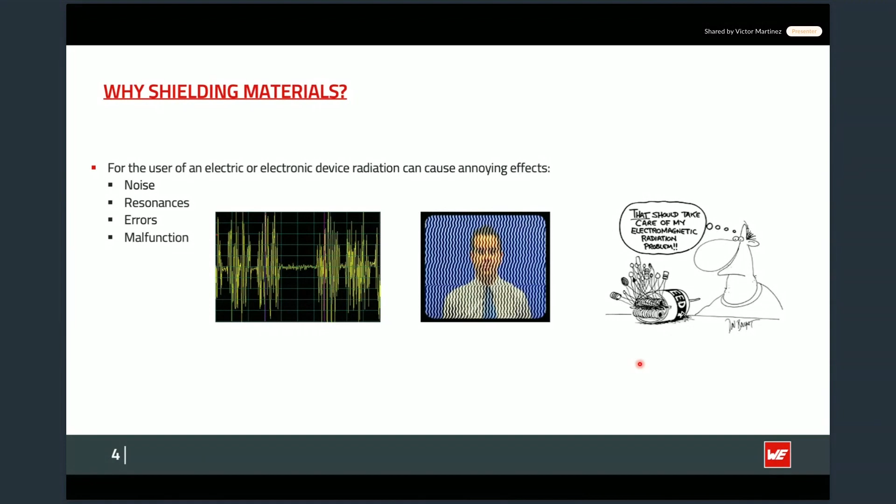Then one of the first things that we need to have clear is what can provoke problems here. Going into the basics, it is an antenna. An antenna will be the root of all the problems that you could face. An antenna can be something pretty big that you can find outside, like the big TV antennas or communication antennas. Or if we go a bit more into our devices, it can be something really basic, like an input-output interface or a cable, or some traces from your PCB, or even the ground planes, or even a small thing like a via.

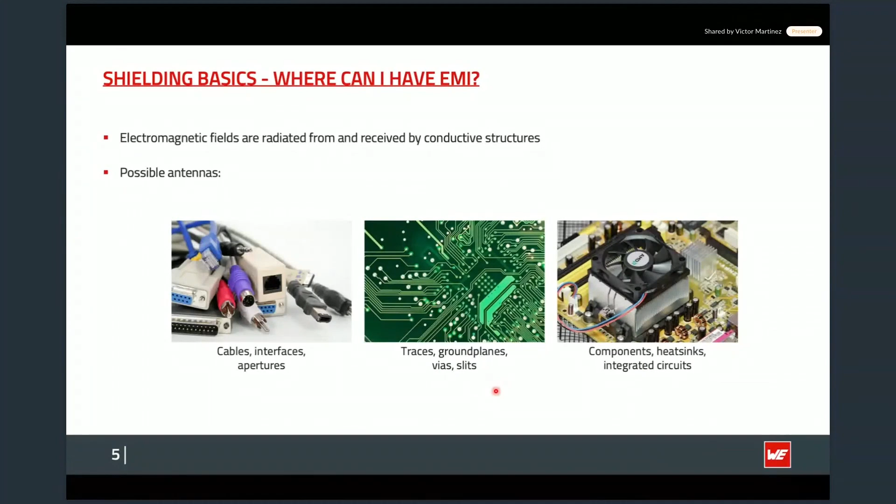And it is not only something physical that you create in your PCB that can act as an antenna. It can be some basic components, like in this case a heatsink, which at the end is something that is only there to dissipate heat.

Then another important thing that we need to clarify about shielding materials is how you can quantify them, or how can you say that one shielding material is better than the other one. In this case, one parameter that the engineers define is the shielding effectiveness, which can also be named attenuation, and the definition of it will be how good the material is in order to attenuate or remove the electromagnetic field.

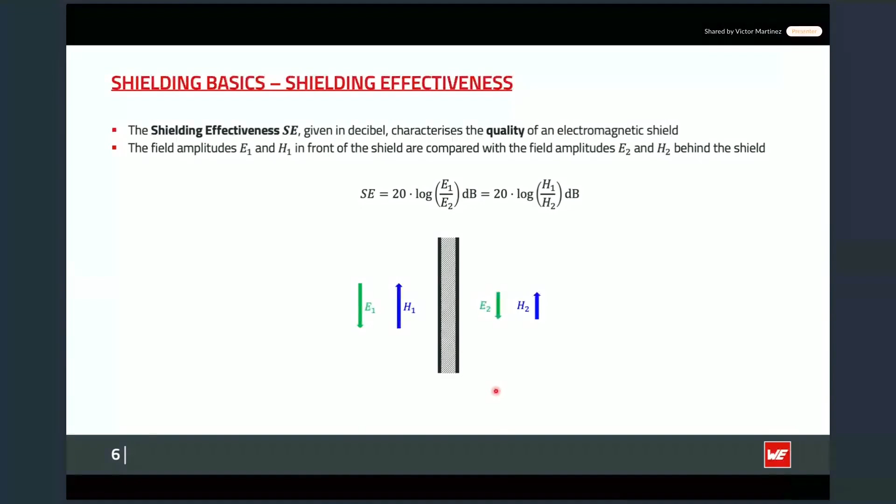And then the mathematical definition of this parameter is pretty simple. At the end, it will be the measurement of the environment without the shielding material minus the measurement of the electromagnetic field of the environment with the material in the middle. So at the end, we could have the real value of how much it will be attenuated.

Then some basic rules of thumb about which material you have to use. Let's say that you have a bad electric field that you want to attenuate. In this case, what you will need to use is a high conductivity or low impedance material, like for example the traditional copper tape, as you can see here, or even the aluminum tape. A good thing here is that the thickness of the material doesn't matter.

So for example, you could go to a really cheap and thin layer of aluminum tape that you can just stick over an area, and then it will automatically react to the electric field by attenuating or absorbing it. And the same will happen if you use, for example, a copper tape or even the conductive fabric tape. So the main thing here is to look for a low impedance material.

But then let's say that we go to the other side of the street, and instead of removing an electric field, what we want to remove is a magnetic field. In this case, we don't want something that has a low impedance. What we are looking for is something that has a high value of permeability. Permeability is the capability of the materials to interact with the magnetic field, meaning that the higher the permeability, the more it will be able to interact with it.

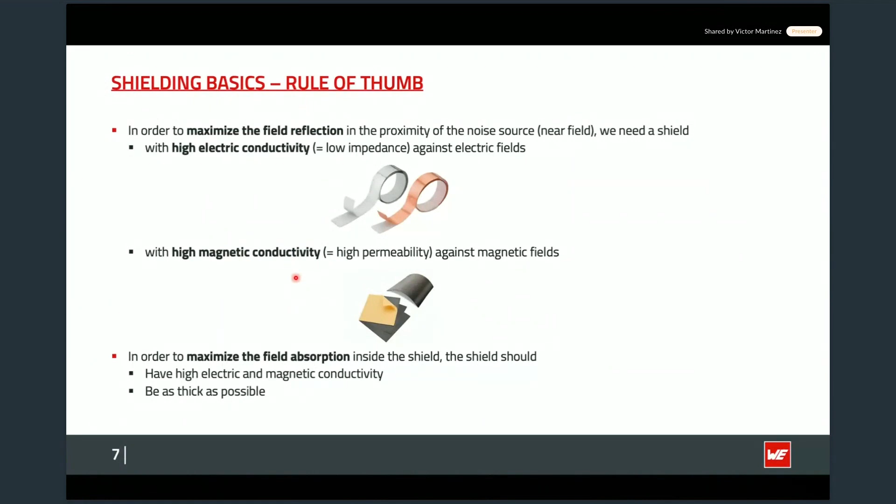And now we are going to jump directly into giving tips about how to use the different products. One of the main products that you can find when looking for shielding materials is EMC gaskets. EMC gaskets can be found everywhere on your device. For example, on the housing, when you have a door or a lid that you need to close. They can also be used on the EMC chambers, as you can see here, or even on the input-output interfaces, to connect the cables.

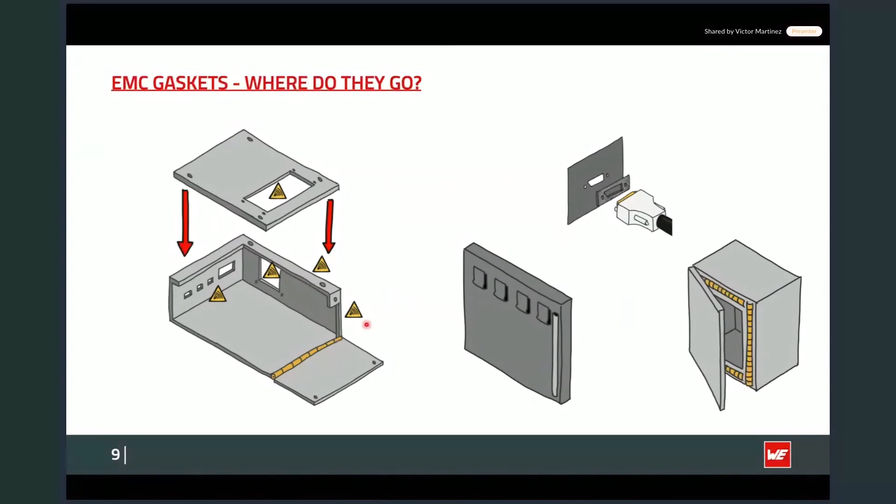And you can already start seeing the pattern here. EMC gaskets are used when you need to make contact between two metallic surfaces, or to fill gaps. Because once we make contact between two metallic surfaces, we may think that everything's super smooth, so I don't have any kind of discontinuity here. But that's not what is happening.

If we get a microscope and zoom in, we can see that we have some small air gaps here that will act as an open door for the noise to go to the outside or into the inside. So here, let's say that this is the housing for your device, and you have your PCB here on the inside.

So then if we are not using an EMC gasket, that means that the electromagnetic noise or the electromagnetic field that is on the outside can go into the inside, and then it will affect, in this case, your PCB. Or if the PCB is creating a lot of noise, then it can go to the outside, and then you will fail, in this case, the EMC test.

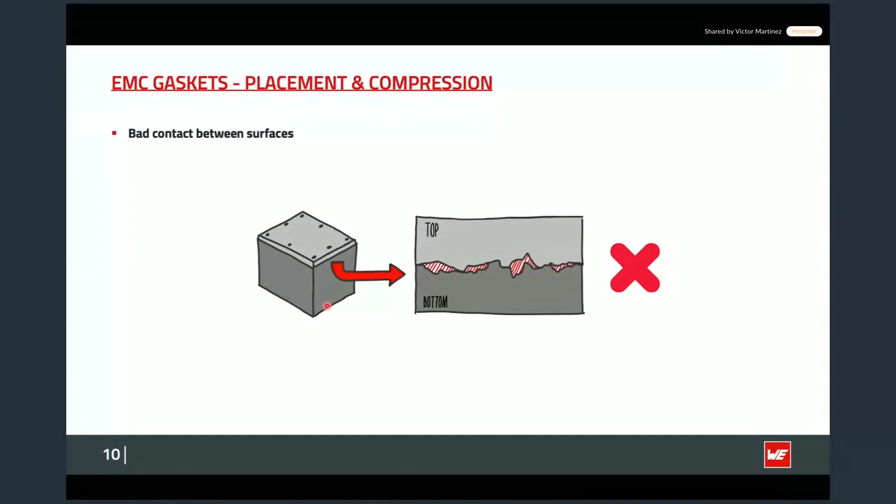And then let's say that the big summary here is that what we want with our housing is, at the end, to have a perfect parallel box that is fully closed. But that's not something that we can reach, especially if you reach out to your colleagues who are mechanical engineers, because at the end you will have ventilation holes, lids, you will have to put a display over there, so then it is not reachable. And that's why you need to use, in this case, EMC gaskets.

Because then let's say in this case that we have the door or the cover. If we are using the EMC gasket there, then we will be able to fill all of those gaps with conductive material, in this case from the EMC gaskets, and then we will be able to have something that is pretty close to a perfect parallel box. So what we will avoid is the noise popping up to the outside or the noise from the outside popping into the inside of our device.

Then another important thing here for the EMC gaskets is that normally there is also another rule of thumb. During this webinar I'm going to say a lot of rules of thumb, because at the end it is the most useful thing: once you are designing your device, you have some guides to later go more into details. So the first rule of thumb in this case for the EMC gasket is to compress them normally

around 20%. Why are we saying that we need to compress the EMC gaskets around 20%? Because that's normally the sweet spot where the gasket can offer the best parameter for conductivity, so the lowest RDC or the lowest impedance value. And at the same time, you are not overstressing the gasket mechanically, meaning that the material, the foam inside or the metallic material, is not overstressed, so you can compress and uncompress it more times if you are compressing it 20% more or less.

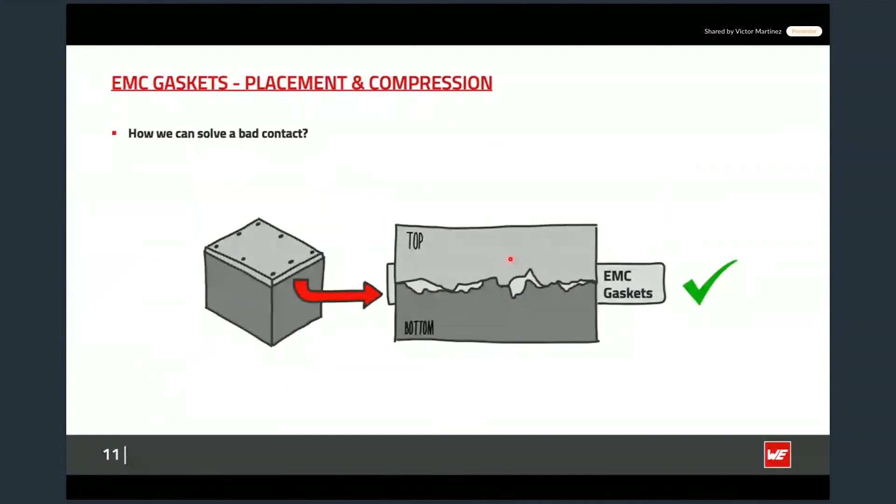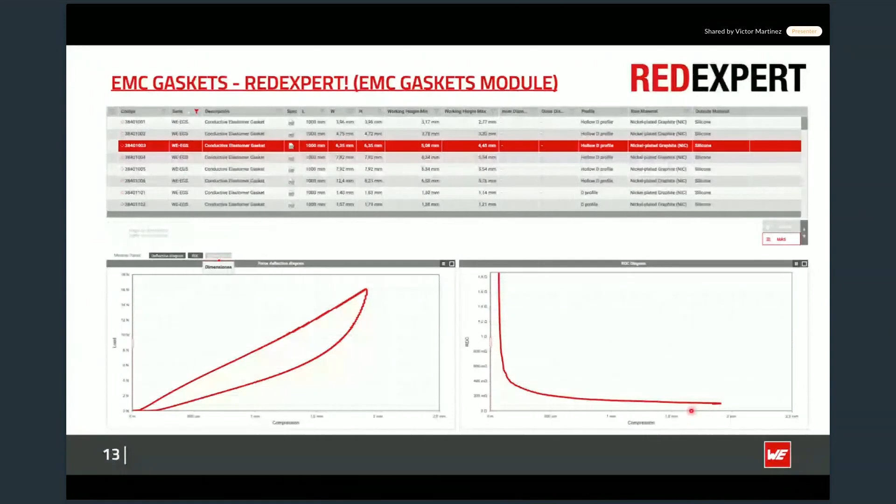And then on the right, what you will be able to see in our REDEXPERT module will be the RDC chart. This is actually a live measurement which we did, just compressing the gasket. So you can see that once we are compressing it between 20% and 30%, which will be more or less this gap here, we are already achieving the sweet spot, the best value of conductivity. And that's why I'm remarking all the time that it is quite important to compress it around that range.

Another important thing about the gaskets is to choose the correct materials. Because at the end, what we are doing is that we are creating a kind of battery, because we have the EMC gaskets, which are a metallic surface, then we are adding a different metal, and then we have the other metallic surface. And what you're provoking here is that at the minimum that you have a small kind of current, you are provoking a battery.

And from those two materials, one will be the cathode and the other will be the anode, making the anode start to lose mass or weight, and it will get oxidated or eaten. Meanwhile, the cathode will start to gain more mass, and at the end you could have an oxidation layer, making it that you don't have conductivity in that place. So that's why it is really important to get a galvanic table of materials, and then to choose the correct partner.

Because in this case, one of the most common, just going to an example, aluminum, is pretty common to use on enclosures because it is light, it is cheap, and also it is pretty rough. And then, for example, let's say that we are going to use a gasket made of nickel-plated copper. So if we check the aluminum, it is in this position. And if we look for the nickel, we can see that they are pretty far away.

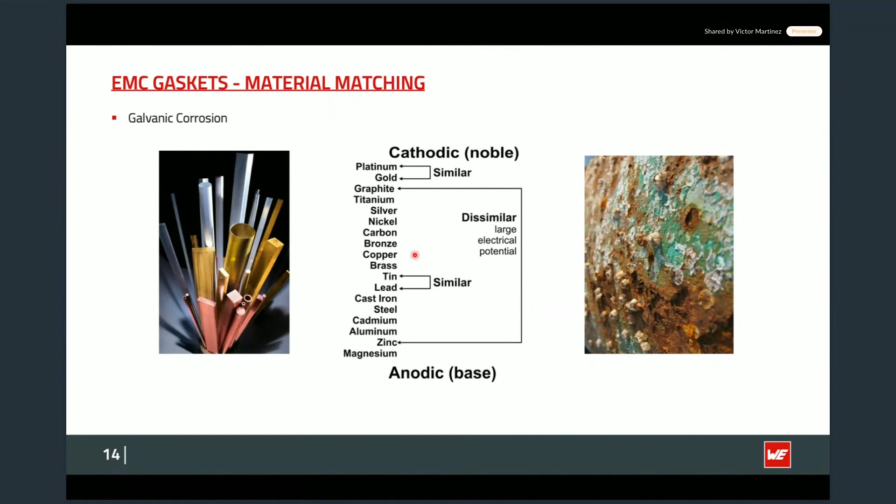And then going back to the gaskets, we have several types of them. We have conductive elastomer gaskets, conductive fabric gaskets, contact stripe gaskets, or in this case metal gaskets, and then we have a knitted wire mesh gasket. So these 4 groups are the most popular or the most traditional ones. And every gasket is meant for one situation.

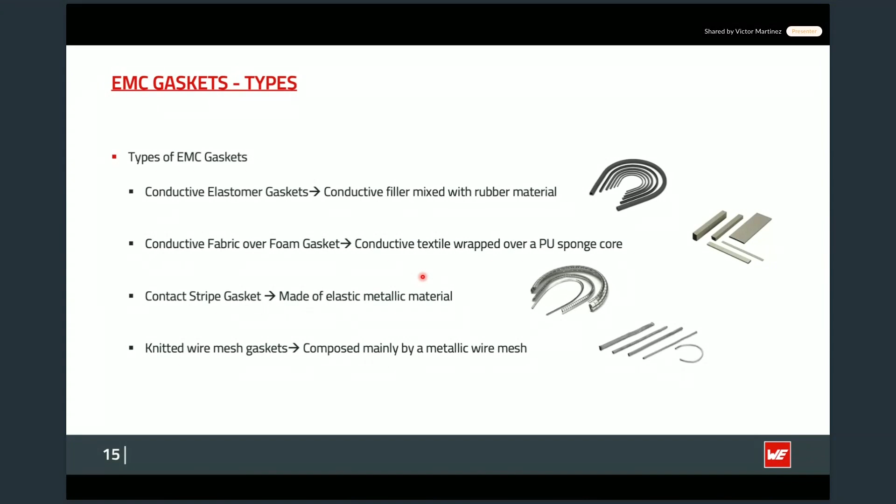So if later you come to me asking which is the best gasket that will fit every situation, every application? Sadly, my answer will be, it does not exist. Or if it exists, it is not going to be really cheap. What I mean with this is that all the gaskets are meant for a specific situation. For example, we created a kind of cheat sheet, like the ones we were using in high school to help ourselves during the test.

And here you can already ask yourself the different questions. For example, which ingress protection value do I need? The ingress protection value is the protection to avoid dust or water going through the gasket. So do I need something above 50? Then we can see that the metal gasket doesn't work, and neither does the knitted wire mesh gasket. So we are left with only these 2 options.

Then the next question you can ask yourself is, which temperature range do I require for my application? If your application requires something above 90 degrees because it is close to an oven, because the standard requires it, or anything like that, then you can discard the conductive fabric over foam gasket, and you only have one choice, the conductive elastomer gasket. But let's say that instead of 90 degrees, the top of the temperature range is lower, like 80 or 70. Then we have these 2 different options.

But when you go to your accounting department, they tell you, no, we need something really cheap, something traditional, and something that is easy to use. So the best choice will be, in this case, the conductive fabric over foam gasket. So again, every gasket suits a specific situation.

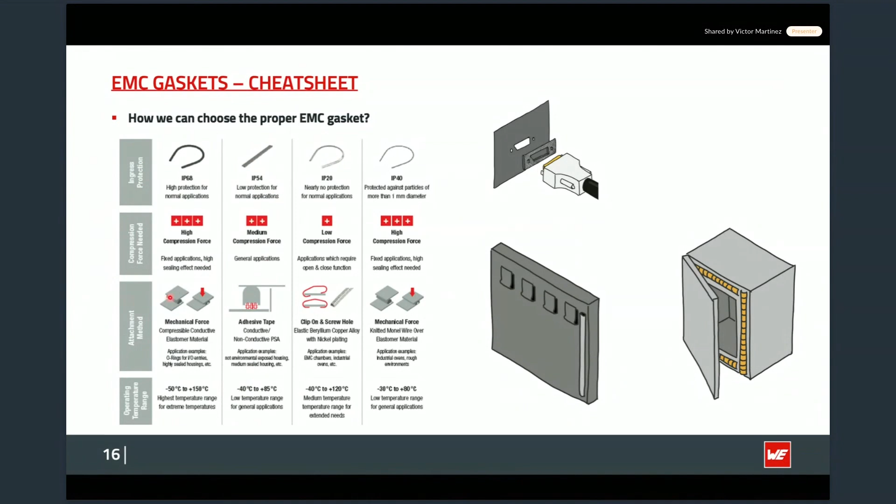Then the next product group that I'm going to jump into is the EMC tapes. EMC tapes can be split into two different groups: the metallic ones and the textile ones. As the name indicates, the metallic ones are mainly made of a metal layer, which can be aluminum or copper. In the textile group, we have only one available for the moment, which is the conductive fabric. The conductive fabric is a piece of cloth whose threads are made of nickel-plated copper, making it conductive.

Then when to use each one of them? Normally there are only two decision makers here that will motivate you to choose one or the other. First of all, it is again which materials I'm going to make contact with, because of the galvanic corrosion effect that we explained before when putting two different materials in contact.

So I need to choose the correct partner here, or the correct match. And then it will be the flexibility. Why is the flexibility a game changer here? Because let's say, for example, you need to use an EMC tape in order to create the shielding for your cable, because your application has the typical cable from AliExpress or from some provider that you may not know in one year because they disappear, and they don't have, in this case, the shielding. So in this case, the conductive fabric can be the best option, mainly because you can already wrap it and it is more flexible.

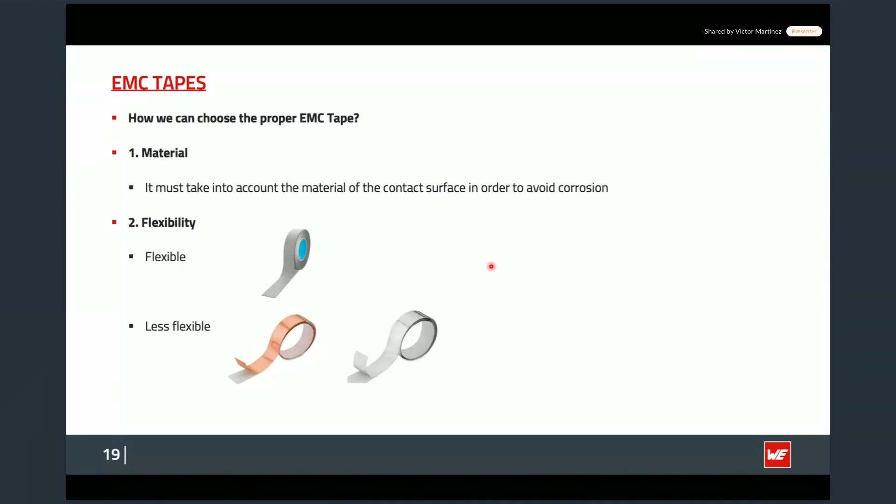Some tips about using the EMC tapes: first of all, the conductive tape that we have on the bottom is a conductive glue that has some conductive particles or conductive bubbles in it. So it is really important and vital that once you are applying the EMC tape, you use a roller, or maybe just your fingers, and rub the top surface of it. Then you are ensuring that you are breaking the bubbles and compressing it extremely well.

That's a really important topic, because if you just place them and don't apply some pressure over them, then what can happen is that you will have an open, or you don't have conductivity, because the bubbles made of conductive powder won't break. So it is something to keep in mind when you are using them.

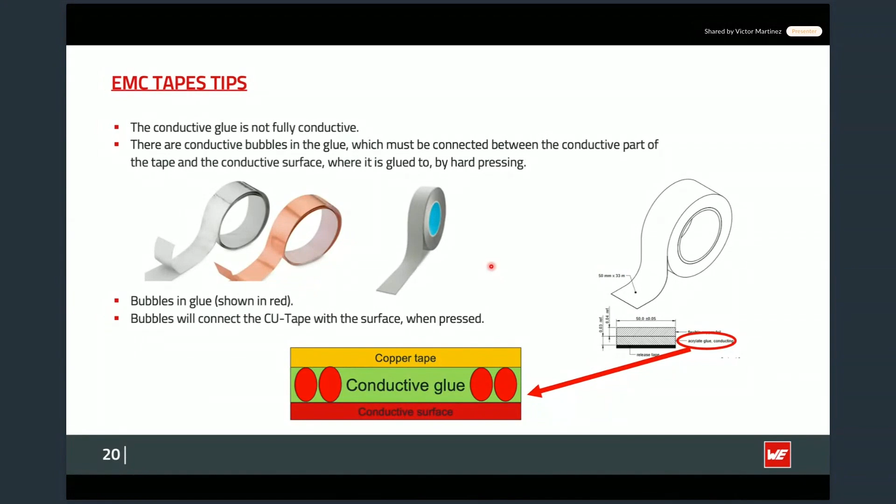Speaking about tapes, I commented that they can be used to create the shielding for the cables, but normally you will use them especially to avoid the pigtails. Like, for example, you can find on this connector or on this USB cable that we found from a provider. So what is a pigtail? A pigtail is a piece of the cable's shielding that is directly linked to the enclosure. The copper layer of the cable is the shielding, and as you can see here, just a small piece is connected to the enclosure, or to the metal case of the cable, making it so that at high frequency you will have a wonderful magnetic field antenna, because you will find here a loop antenna.

Speaking from experience, this is normally one of the main issues you could face in the EMC chamber. Once you go in with your device, if you are using a cable that is not really trusted and you don't know where the noise is coming from, my first recommendation would be to check the cables, because they can be a really nice source of problems.

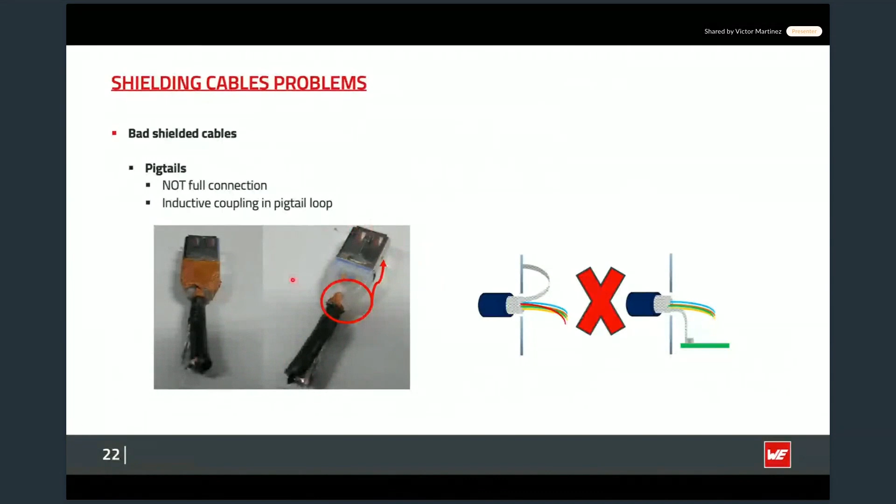And what's the best way to fix this issue? Really simple. Just wrap the whole cable with the shielding material, like the shielding textile or maybe some metallic wire mesh. Wrap the cables and then add as many contact points as possible to the ground plane, or maybe to the housing. And also be sure that those contact points ensure that you have a 360 connection to the enclosure, so that they are fully wrapping the whole cable.

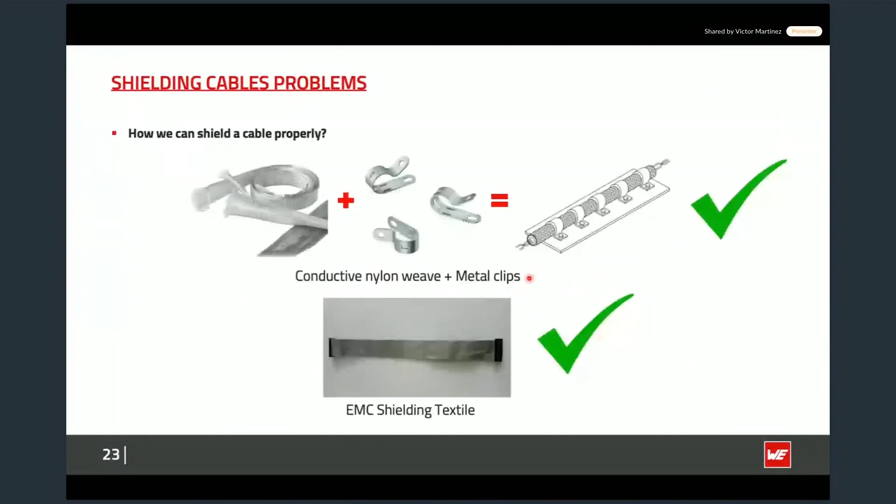This is required because what you are avoiding by doing the 360 connection is, in this case, the pigtails, which is just a small piece over there, because then you are offering more path to the noise to go through it.

Another important thing is to not paint over the surface where you're going to connect, in this case, the cable. Because if you are adding paint, and normally paints are not really conductive, then you are just placing something conductive over something that is non-conductive. So be aware also about that kind of problem.

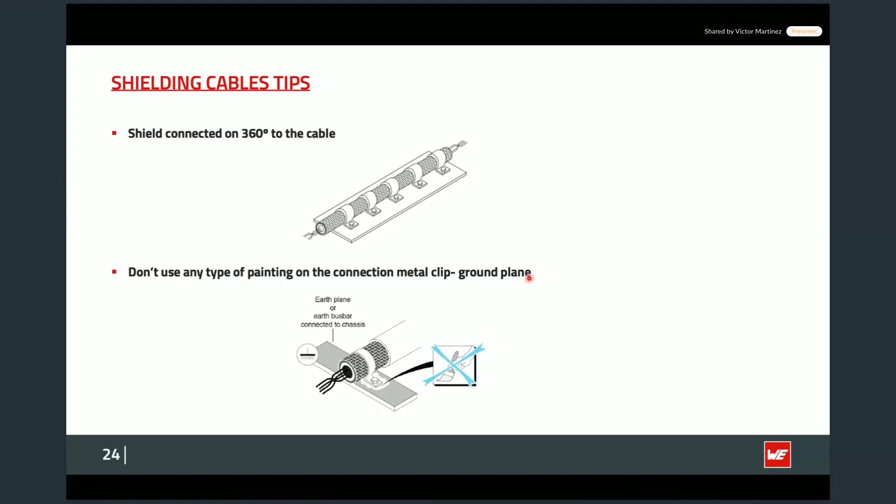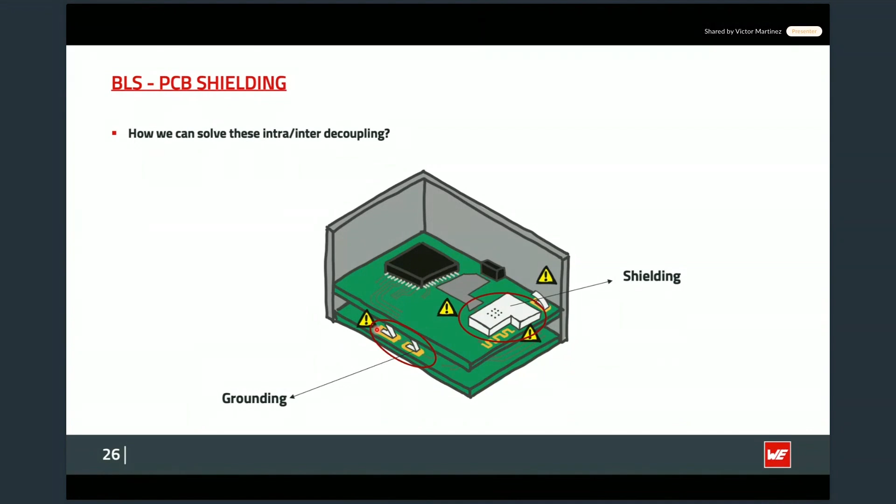Then the next point is going to be the board level shielding. Board level shielding, as the name says, is the shielding products that we normally use or face in our PCBs. In order to improve the shielding from our PCBs, we have two different ways. We can use some shielding, like create our small Faraday boxes inside of our PCB or inside of our device. Or we can improve the grounding, to redirect the noise from our PCB to the ground plane or to the housing.

And for that, there are two different types of products. We have the contact fingers, contact springs, or spring contacts, depending on the provider. They are named by several names, but at the end, it is just these feather contacts, just a piece of beryllium copper that is elastic.

And then we also have some SMT gaskets, which follow the same principle as the EMC gaskets, but instead of being placed on the cover, they are meant to be solderable. So they are suitable for pick and place and to be used on the PCB. But the main definition is the same: an elastic core surrounded by a metallic material.

And then in order to improve the shielding by creating Faraday boxes inside of our PCB, what we have in this case is the shielding cabinets. You may also know them as shielding cans or Faraday boxes.

Then jumping into detail, first of all, about how to improve the grounding from our PCB. Choosing the correct grounding contact is really simple. The first thing you need to have in mind is the contact point. It is important to know from where you're going to make the contact, whether from the horizontal axis or the vertical one, because then you can already discard many different shapes and options.

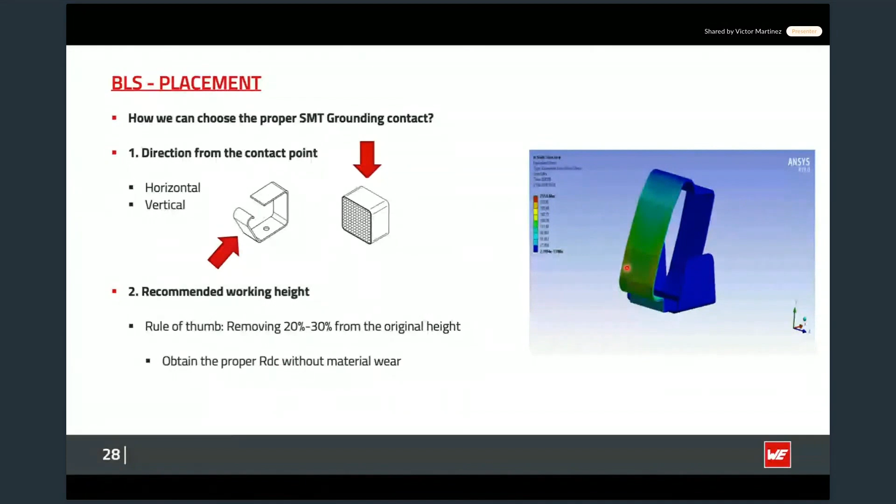And then, as you can see here, this is really important, as I commented, because there are some parts from this contact finger that are already being stressed out.

And then another important thing in this case, like for the EMC gaskets, is the galvanic corrosion. Depending on where you're going to make contact with your PCB, because probably you are going to make contact from your PCB to another PCB or to the housing, it is really important to know which materials you are going to make contact with. Because again, if it is going to be aluminum, then to avoid any kind of corrosion you want a contact finger that won't face corrosion, because you want to have conductivity all the time. That's why we have contact fingers made of nickel or contact fingers made of gold, because they are materials that can withstand galvanic corrosion.

And then another important thing is how to solder them. SMT grounding contacts are suitable for pick and place, but some of them are made of nickel. You need to be sure that the bottom surface of the nickel plated contact fingers or SMT contacts have a small layer of tin plating, because then you won't face any issue during the soldering process. Nickel is a material that normally takes a lot of time to solder properly, and you will probably need to make the PCB go through the reflow oven more than once or even more than twice.

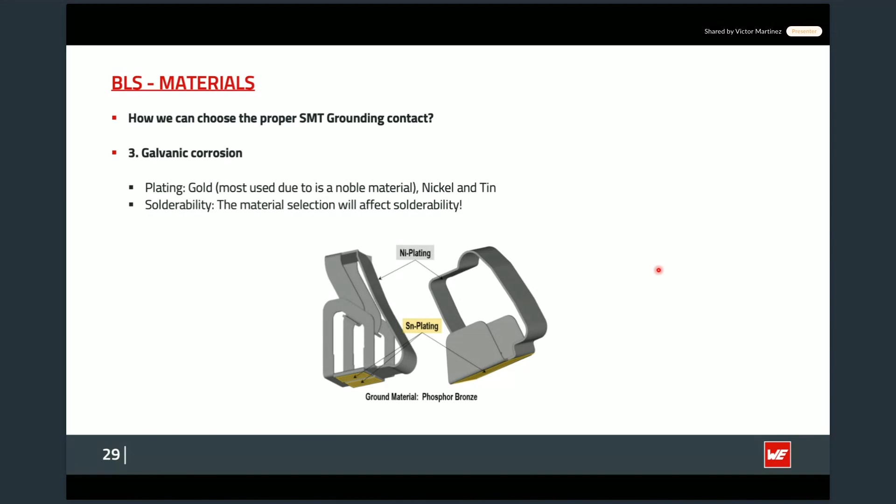And then again, like for the EMC gaskets, we have a REDEXPERT module. By checking out our REDEXPERT module, you will have more or less the same information as for the EMC gasket. You will be able to find the compression charts, the force deflection diagram, where you will have how much force you need to compress the contact finger or the grounding contact, and how much force the grounding contact is making against your device or the surface it is being compressed against. And then you will also have another chart about the conductivity or the RDC.

So you can already see that once you are compressing it just a tiny bit, you already have the best value of performance. But again, normally the sweet spot is to have 20-30%, which will be something around this range. And at the same time, you will be able to find the dimensions and also the solder footprint.

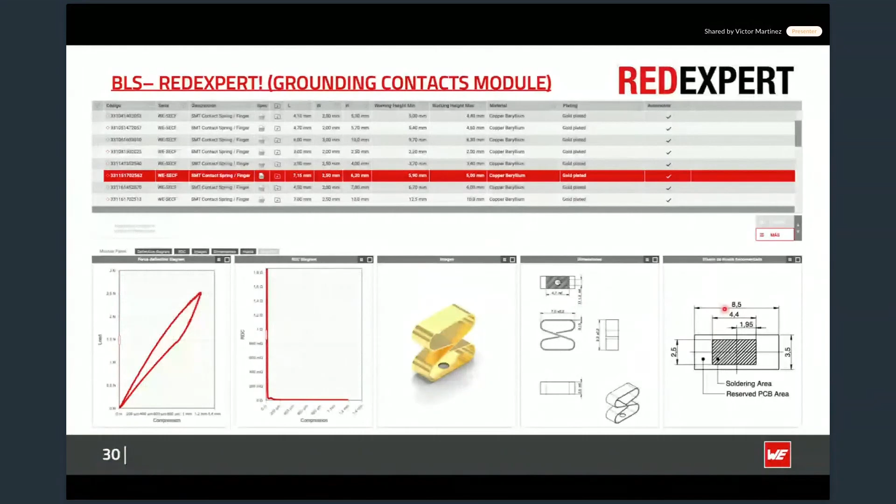Now we are going to go into the shielding products, or the Faraday boxes that we could find for board level shielding. As I explained before, for the Faraday boxes we have the shielding cabinets. Our main goal will be the same as we have for our housing: just to isolate one small area from the environment, to create our little corner or black box where nothing can go inside or nothing can go outside. So what you are improving will be the immunity and also the radiation problems.

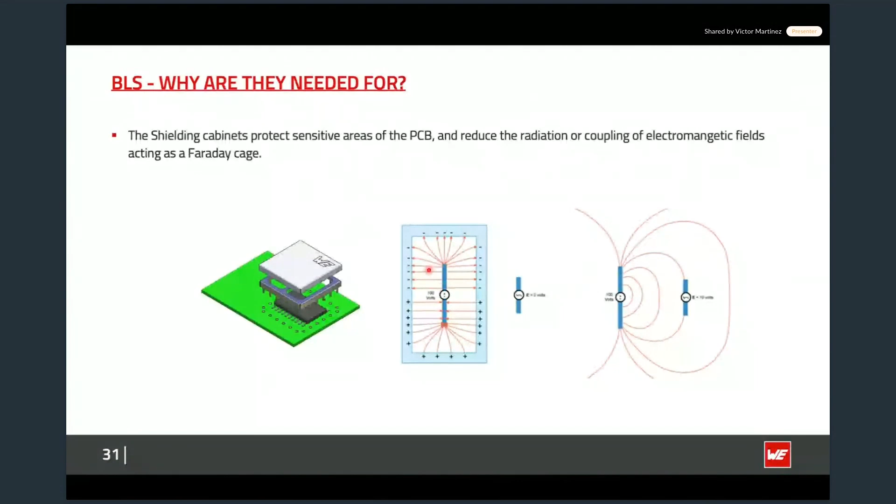And also the same will happen the other way around. Let's say that we have the source of our problems outside. Then by isolating our victim, we will avoid it being affected by some other device or some other field that we have outside.

Then for the shielding cabinets, there are several types of them. One of them is the traditional ones. Why do they have the name traditional? They have the name traditional because of how they are manufactured. We get the metal sheet, and then we just work the material by bending it.

By doing this, we have some small corners on the edges, like you can see here, here, or there. They are really tiny apertures that in the low frequency range are normally not a big problem. But once we start to work with high frequency applications like 5G or even radar applications, these tiny corners can already be an open door for the noise, the signals, or the fields to go inside or to go outside.

And not only these tiny gaps, but also these tiny apertures that we have designed in order to allow all the traces to go outside and inside. So that's why we name them traditional and why they are normally used for low frequency.

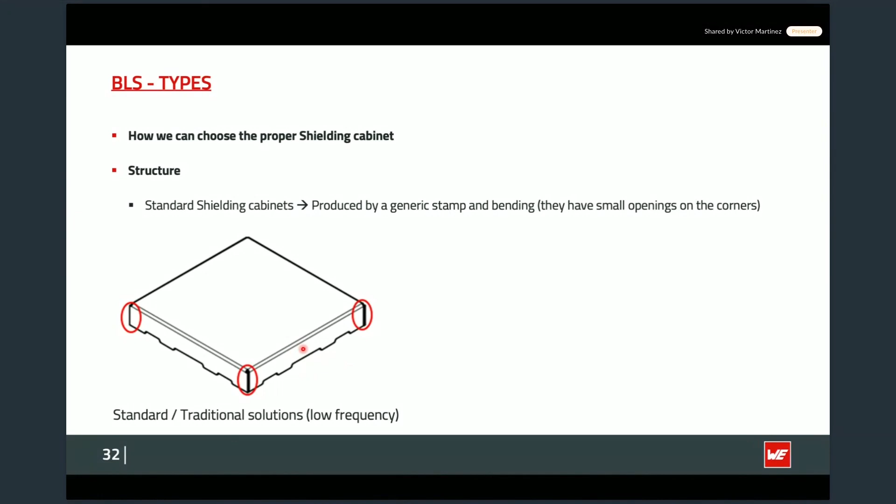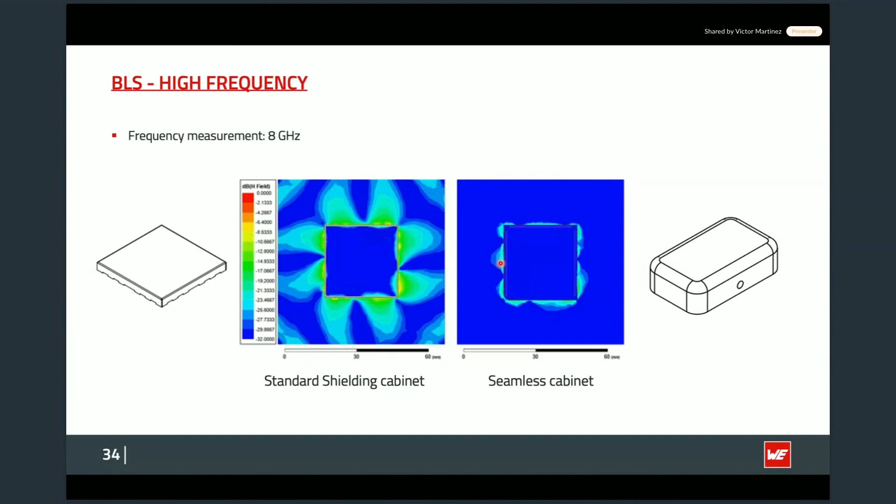Then some tips about shielding cabinets. One of the first things to keep in mind is that in the end we have a metallic piece, and metallic pieces placed outside, like a metallic fence or a metal pole, get oxidized just by the humidity of the environment or the saltiness of the environment. The standard cabinets are normally made of tin-plated steel, and tin-plated steel, especially on the edges, gets corroded or oxidized extremely easily.

This oxidation won't affect the shielding effectiveness. It will only cause two side effects. The first is that it will be more difficult to solder it to the PCB. The second is that it won't look as good to the end customer. As we commented before, end customers want something colorful, stylish, polished, that looks good to the eye. If it is oxidized, they will probably think it is not as good as a brand new product. But the main thing is that it won't affect the shielding performance of the cabinet.

But let's say you need it for the end customer. Then the material can be changed from tin-plated steel to nickel silver, which has a higher resistance against corrosion.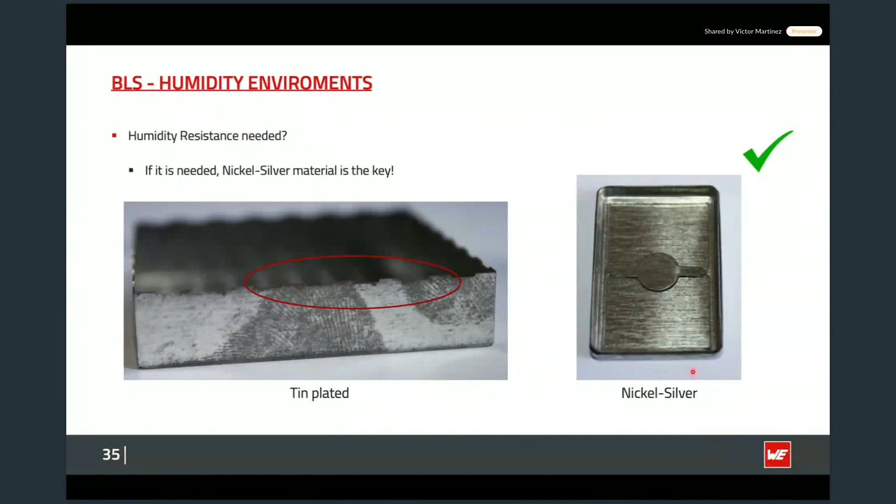As you can see, these two cabinets were exposed to a salt spray test that we did internally inside of the company. And as you can see here, there is no sign of corrosion on the nickel silver cabinet, because nickel silver has a better capability to deal with corrosion and also with humid environments and salty environments. So that's why we normally recommend these kinds of materials when the end application is going to be placed, for example, next to the beach or in a salty environment, or in a really humid environment, or even in the automotive sector.

Another important thing about the shielding cabinets is to use the standard dimensions as much as possible. Why is this important? Not only because we have over 260 standard dimensions, it is mainly a matter of cost. The shielding cabinets can be customized to create any kind of shape that you need. We can make them with inside compartments, with a specific shape for you, or even with different kinds of materials.

But at the end, we are working metal, and working metal is not a cheap thing to do, meaning that there will be some cost needed here. And that's something that normally is not suitable, especially for samples. So the advice here is to keep in mind that you will probably need a shielding cabinet from the first time, and to already add the footprints to the areas which you think can be a bit sensitive or problematic.

By just adding the footprint, once you are, for example, in the EMC lab and you know that you have problems with one specific area, you can already make the test and try the cabinet without having to wait weeks for the prototype of a specific cabinet because you didn't think about it in advance. So that's why it is really important to have it in mind from the first moment.

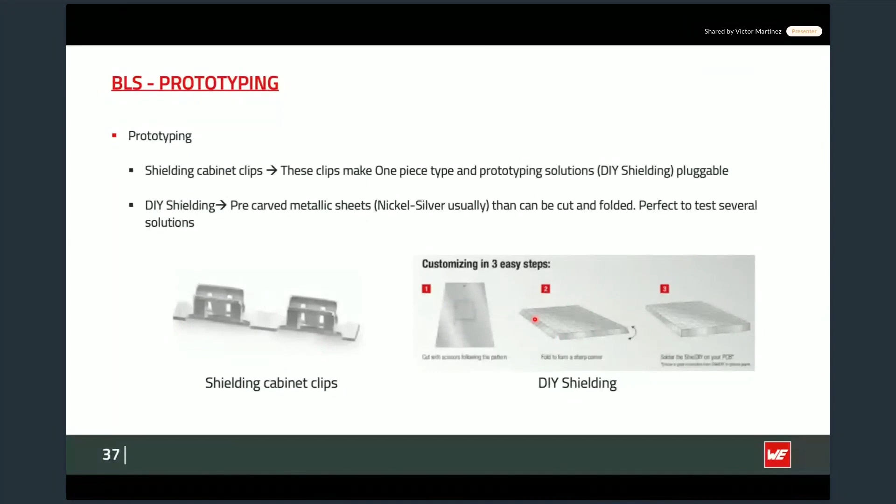And the good thing with us is that once you have the draft for the cabinet, done with the do-it-yourself kit, you can just come to us and we'll fully create the mass production cabinet for you.

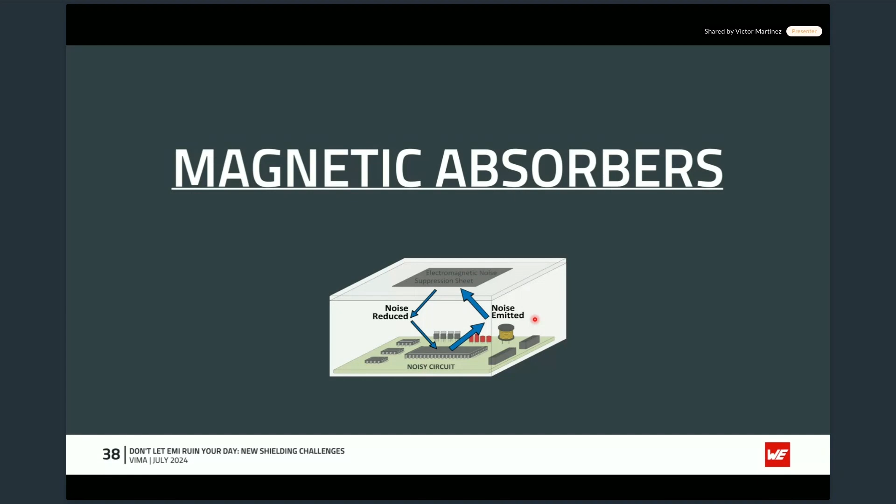And now I'm going to jump to the magnetic absorbers, which are normally the products most related to black magic, because they are a bit complicated or a bit, let's say, out of the standard. So one of the main things that we need to have clear, as we commented before, is the permeability. The permeability, as I explained, is the capability of the material to play with the magnetic field from the environment.

And then, as you can see here, once we have a magnetic field and we add a magnetic material, like in this case a ferrite, we can see that the lines from the magnetic field are being affected, mainly because of the permeability of the material. The permeability actually has two different components: reflection and absorption. The mu prime, as I commented, is reflection, and the absorption is the mu double prime.

The reflection is the capability of the material to redirect, in this case, the magnetic field, and normally it is quite high in the low frequency. The absorption is the capability of the material to absorb the magnetic field and transfer it into heat. By heat, I don't mean you will have a small thermal generator there. Maybe the absorber, instead of being at 20 degrees, will be at 20.1 or 20.01. So it is not something dangerous for your application.

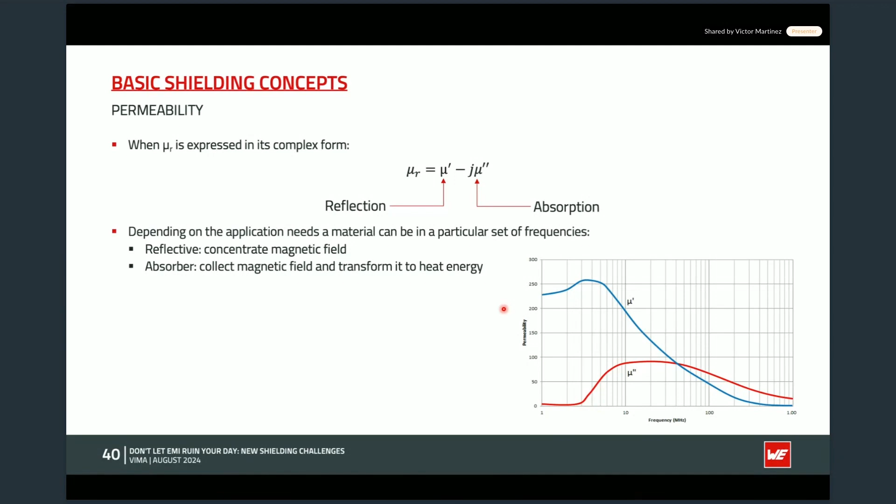Then why is the permeability important? Because not only on our website, everywhere you will find different types of magnetic absorbers, and all of them have different values of permeability. Those values are mainly determined by the mixture of magnetic materials like the ferrite, the manganese, and some other materials in the mixture, and also how the flakes are oriented.

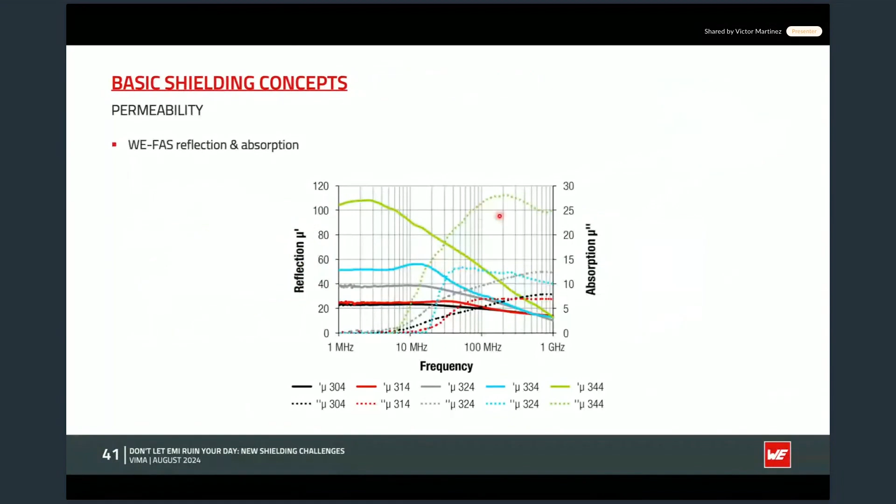Then where can magnetic absorbers be used? That could be a question in your minds currently. Magnetic absorbers can be used in several applications; normally it is totally up to your imagination, because we have seen many different things. For example, one common application is to clean the noise from your trace, to avoid crosstalk or ringing noise in your signal data. By just sticking it onto the trace, thanks to its capability to absorb noise, it will clean the ringing effect you have there.

And let's say you have your housing and you already detected in your EMC lab or with your measurement equipment that inside your device you have some noise caused by a device you can't identify, and you have already mass produced the PCB, so you cannot redesign it. A solution can be to stick the magnetic absorber inside or in the middle of the housing, and by its permeability values it will absorb the noise, redirect it, or shift it to a different frequency range. By doing this, you will protect the rest of your components from the noisy area.

I'm saying all the time that you stick it over the surface or over the trace. The magnetic absorbers are composed of a layer of the magnetic mixture, and on the bottom they have an adhesive layer, a non-conductive one, to ensure that you won't have any kind of short circuit.

So then it is really simple. It is at the end like a football sticker: you just remove the release tape, stick it wherever you think it is needed, and then check it out. And then if it is needed, you can just leave it over there and request the mass production of a specific shape.

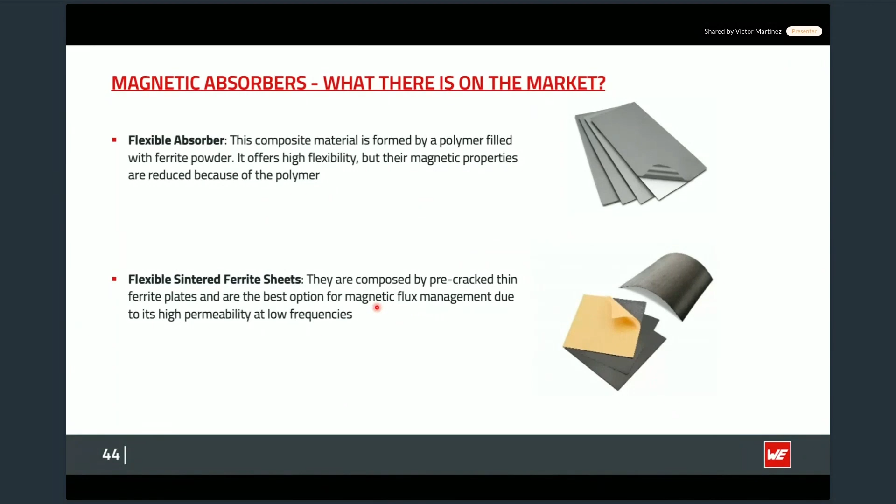Then some other applications of where to use the magnetic absorbers. They can be used, for example, to remove intra-decoupling and inter-decoupling problems. The main difference between them is that intra-decoupling problems are when we have the noise source affecting something on the same level or the same PCB. So it mostly affects horizontally. Meanwhile, inter-decoupling problems affect the vertical axis, so different layers.

This problem is quite common, for example, in server racks, where you have several PCBs stacked one over the other, and one IC from one PCB can be affecting another PCB. While the intra-decoupling problems are normally the ones for the typical PCB, when you have, for example, your iPhone or your mobile phone, and something is creating noise on the same level or to the component next to it.

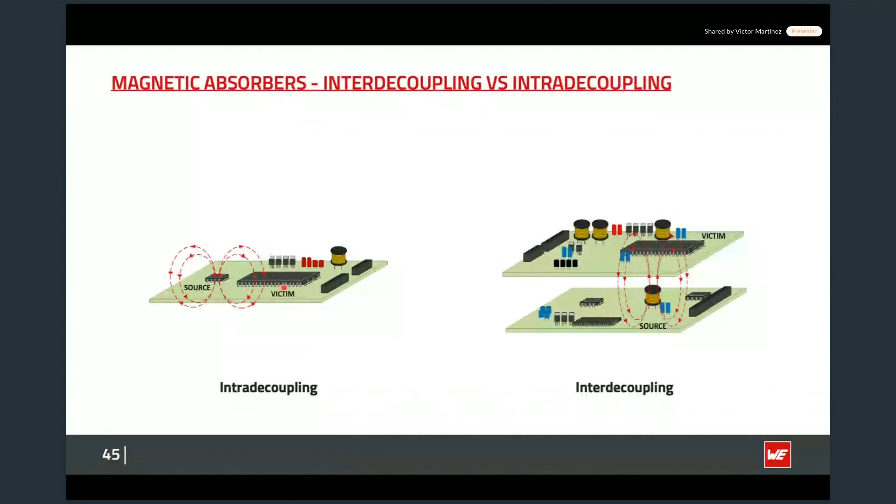And then another really popular application in this case is wireless power applications and NFC RFID applications. For example, if you just grab your phone or your wireless charger, you will be able to see that you have a wireless coil. And on the bottom of it, you will find that you have a ferrite sheet, in this case a blackish or dark sheet.

That material that I'm remarking now is an FSFS, or a flexible sintered ferrite sheet. They are really common in these kinds of applications, mainly because when you are designing your NFC antenna, you are normally designing it in a perfect environment, not thinking about, for example, the battery from your phone, the metal case from the housing, or the door or wall where the device is going to be placed.

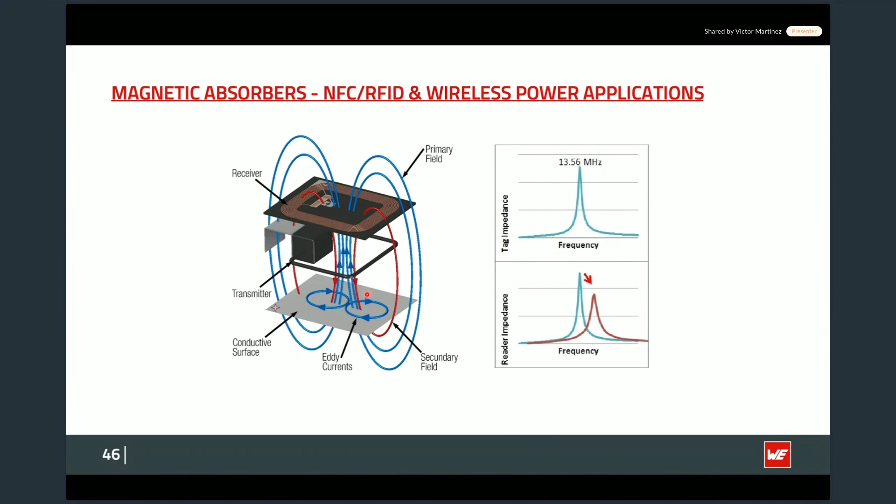What you normally use is this kind of material, the ferrite plates, like this one or this one, placing it between your metallic surface and your coil. I like to explain that it acts like a mirror. Once the magnetic field from the antenna is facing the ferrite, it is pushed or redirected to the top, so it does not touch the conductive surface. So we don't have the eddy current nor the unexpected electric field, and the whole system is fully controlled.

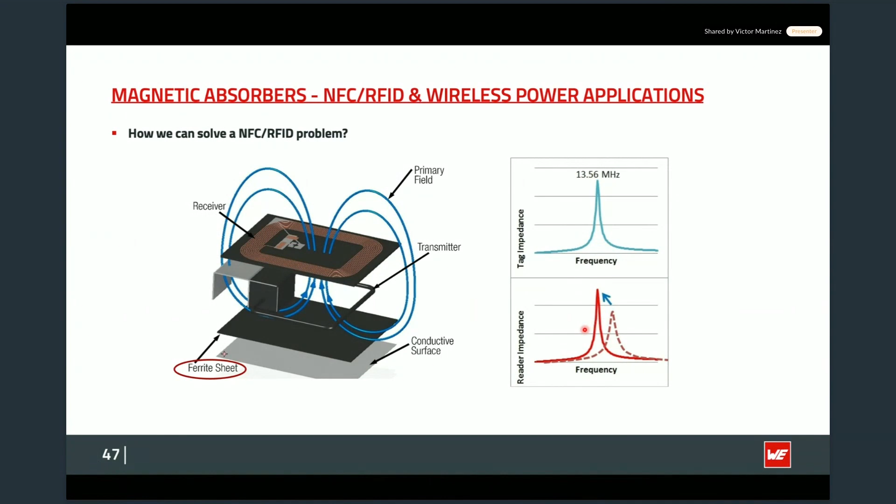By doing this, you are able to remove the shifting, or correct your signal. And in most cases, you are at the same time amplifying the power or the amplitude of your signal, and by this you will improve your communication system.

Now, probably the question is, okay, so which one should I choose? Because you commented that you have several permeabilities, several factors, several applications. So there are too many. Sadly, yes, there are too many. But the best way to know which one to choose is first to check the permeabilities, because by checking them you will be able to sort out which one you need depending on your frequency range. Let's say you have an application facing problems over 100 megahertz, and you need to absorb a lot of noise over that range. Then you already know that maybe this magnetic absorber sheet, which was the 344 if I remember correctly, will have the best performance.

Once we know which one we need, the second step is to call our colleague from Würth Elektronik and ask for samples of different thicknesses and different permeabilities, like this one, and even the red one and the gray one, and then try them in your device. Why am I saying this? Because in the end, the shielding effectiveness value I explained at the beginning is solely a reference value, and it depends on several factors, like the measurement setup.

It will depend also, for example, on the distance between the source and the noise. It will depend on your application. So it is something that you can't control. So then the best thing is just to ask for the sample, use it on your application, and then run a measurement and see if it works or if you need more or if you need less.

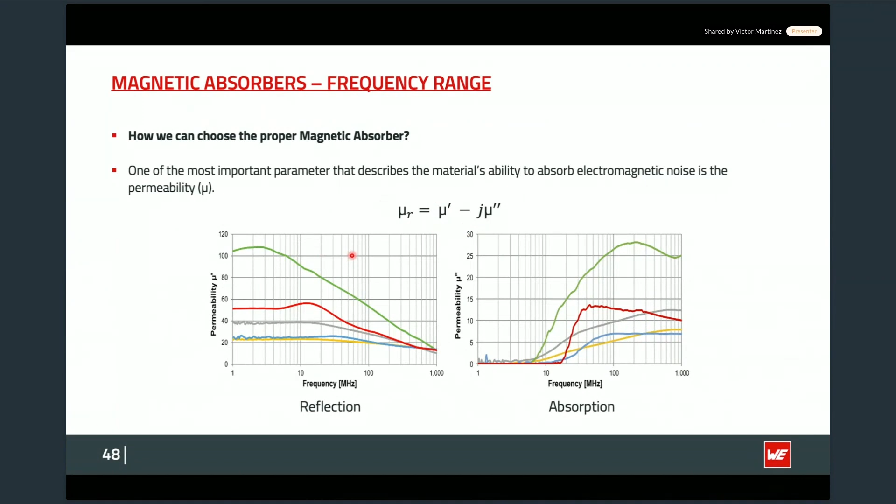Also at the beginning, I said that a common source of noise can be the heat sinks. There are also solutions on the market to help remove all the problems that the heatsink can provoke. First of all, going to the basics, a heatsink can be an antenna, because what we have is a really nice metallic surface that is making contact with another metallic surface, which can be the PCB or the CPU. So you have a metallic surface, a blank space or air, and then another metallic surface. So you have a capacitor, and that capacitor can create some unexpected problems that maybe you didn't think about in advance.

And probably the first reaction will be, okay, maybe I can remove the heatsink. And then your colleague from mechanical engineering will reach you and say, don't do it, the whole thing will just melt. So the heatsink is a must. Then there is a solution, normally the gap fillers or thermal materials, but they are not doing anything from the EMC point of view. Actually, they are just adding more space, so they are changing the capacitive effect here.

That's why there are some flexible absorbers that have ceramic powder in them. So it is a mix between an absorber and a thermal material, meaning that by placing them in the middle, you will be able to absorb the noise that the heatsink could be provoking, or this capacitive effect that you have here. And at the same time, as it has ceramic powder, you will be able to conduct all the heat from your IC or your CPU through the absorber to the heatsink.

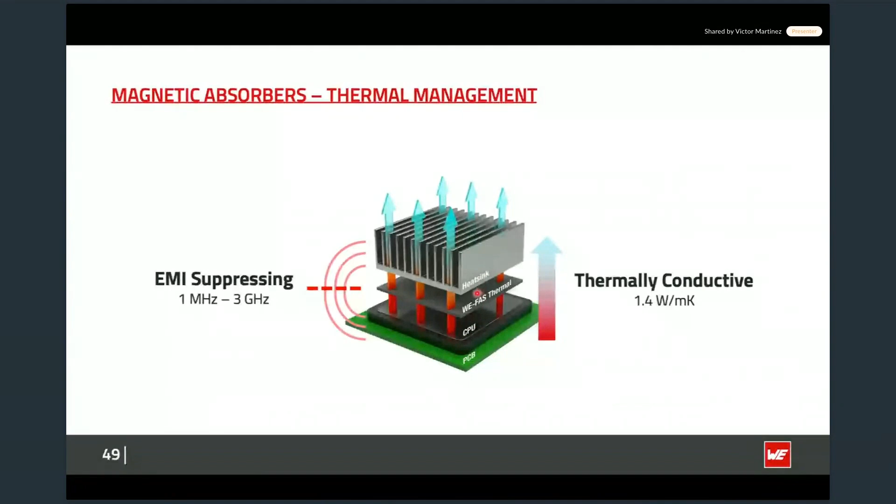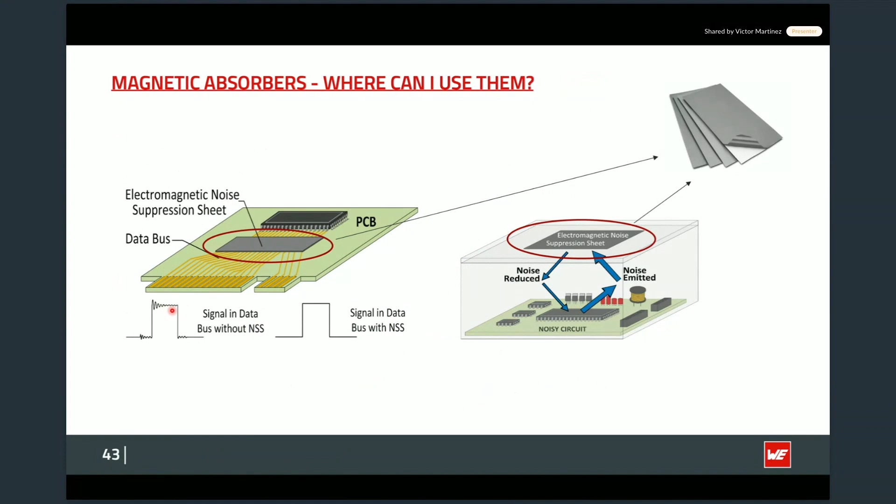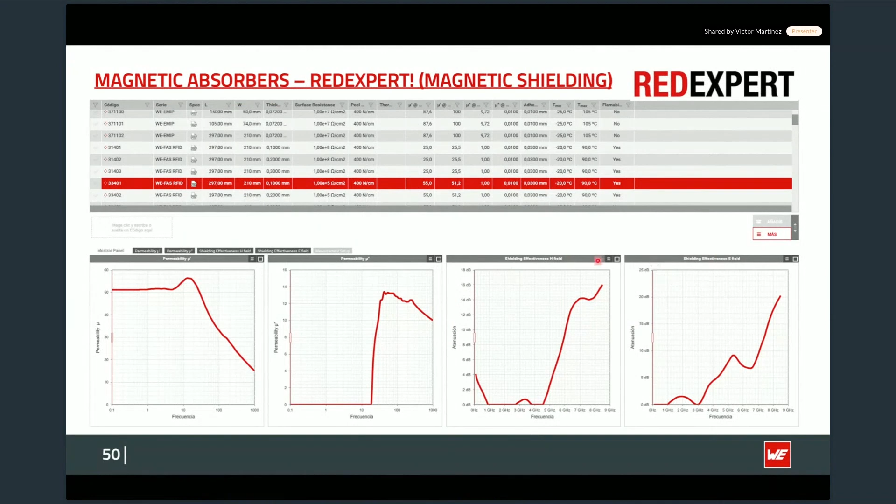In this case, to remove the signal from the trace, meaning that these two charts that you can see here are the noise that the absorber is removing from a trace, in this case from a microstrip line. This is the noise that we measured with a magnetic field antenna, and this one with an electric field antenna. So you can already more or less sort out which absorber you need.

And then last but not least, in the last 2 months, we released a new product to the market, which we name the EMI absorber patch or the EMI patch. What we have here is a metal layer over a magnetic absorber.

So what we have is an electric layer, or a low impedance conductive layer, with a magnetic layer. So you are able to kill two birds with one shot, meaning that you can use this material no matter the problem you have: it will remove the electric field with the aluminum layer and at the same time the magnetic field with the magnetic layer. And for the times where you need to avoid any kind of short circuit or to improve the ESD of your application, we also have a version with PET.

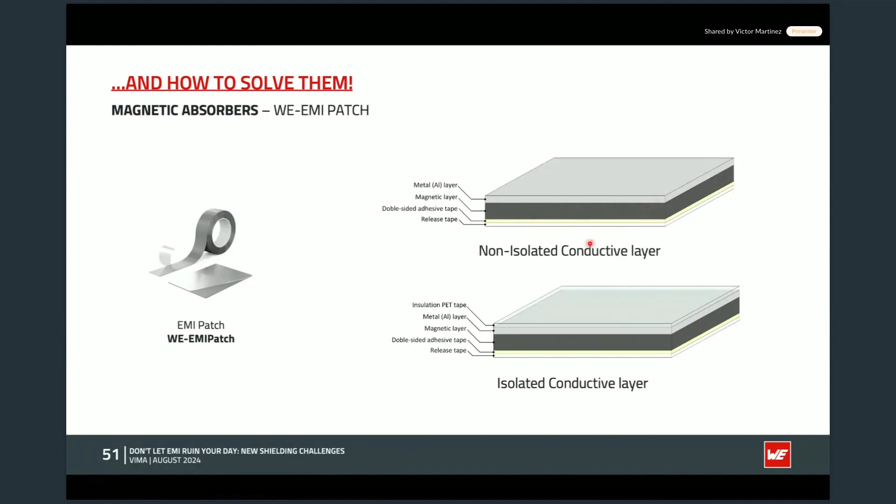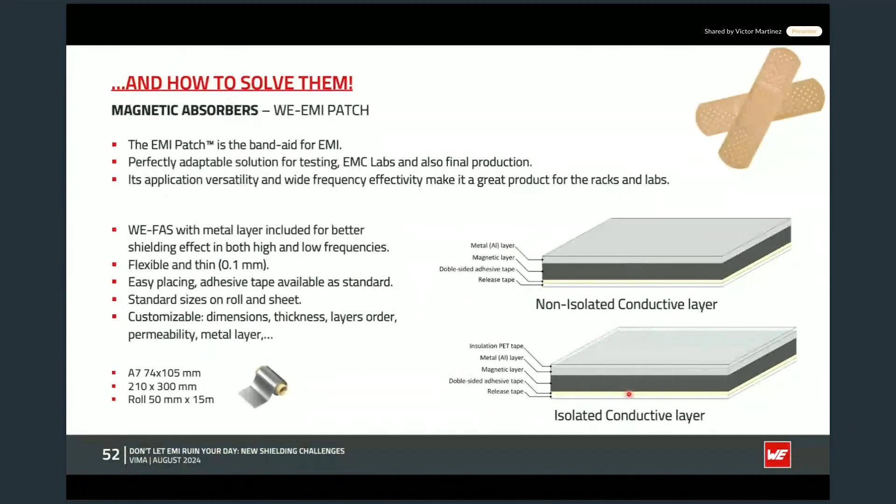Some important information about this product is that we can produce it in different shapes, like on a roll or on a sheet. We can change the thickness, we can change the magnetic layer to get the right level of permeability. We can change the material. We can add an extra PET layer or an extra adhesive layer to make it sticky on the top and also on the bottom. So it can be fully customized.

And the good thing about it is that it will help for everything, as I commented before. First of all, it will help mitigate all the EMI problems that you may face, even for intra-decoupling or inter-decoupling. And at the same time, as we have the metal layer, it will help dissipate the heat from your IC or from a ground plane on your PCB. Meaning that you can place a thermal interface material to make contact with the housing, and then you will be able to attenuate the EMC or EMI noise and at the same time transfer the heat from your IC to the heatsink.

And last but not least, maybe you are thinking, okay, but you have a metal layer or metal plane that is not connected to the ground plane. That's dangerous because then you will have a floating ground plane. Yes and no. You will have it, but based on the measurements we did, we designed this magnetic layer to attenuate this effect of the ground plane. And in the worst case, if you want to connect it just to be sure, that's why we have the no PET version, the non-isolated version, meaning that you can connect the metal layer directly to your ground plane using, for example, the aluminum tape that we have in our portfolio.

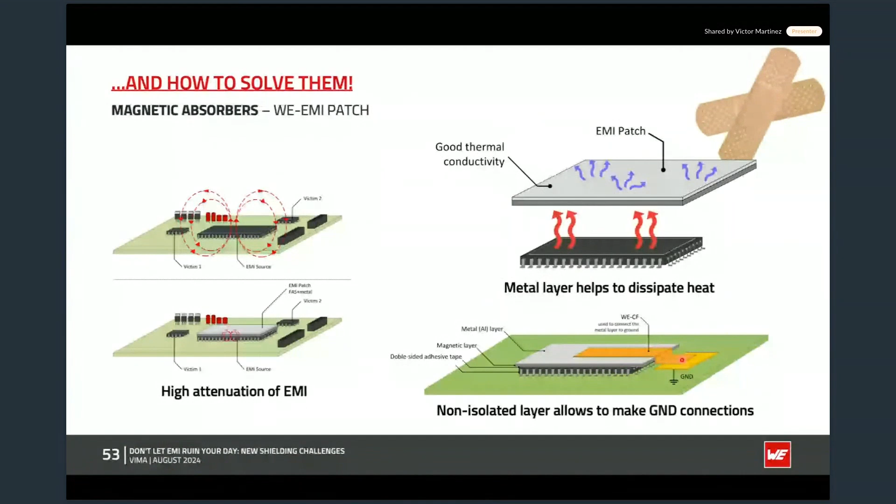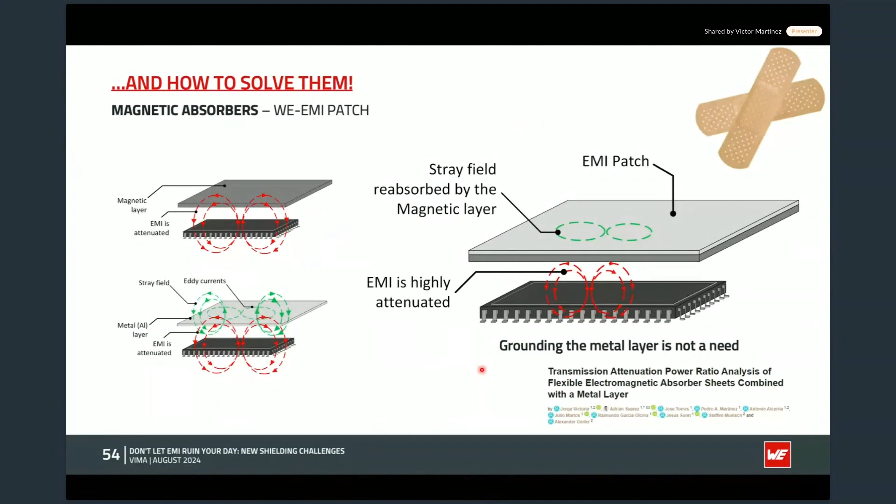Meaning that if you don't want to redesign your PCB because you're already at the last stage of your device, but you need something close to a shielding cabinet in one specific area, like an IC, a trace, an inductor, a clock or anything like that, you can just cut a small piece of this material, stick it over it, and you will have the same level of performance. So it is a natural alternative that won't require you to redesign the whole PCB.

Absolutely. From a company standpoint, we would love it if you simply used the EMI patch constantly, but it's just not feasible, and we're not going to lead you down the wrong path here.